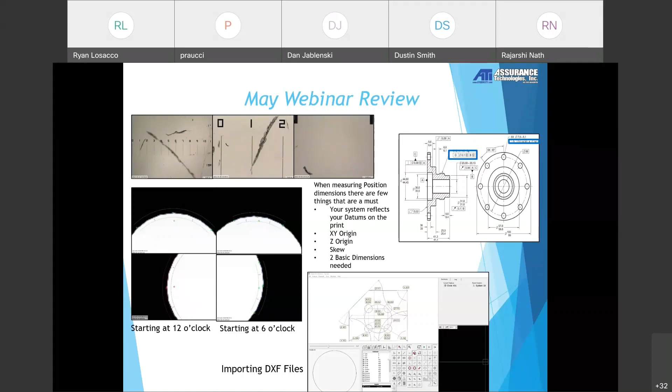And the last thing we talked about in the May webinar was importing DXF files and how we're able to actually have an offline version of Inspec that you're able to purchase, so you can program off of DXFs anywhere that you have a computer and you can plug that dongle into. A lot of people ask me if there's a demo version of Inspec. Anybody can download the software off of Micro-Vu's website, but you need that dongle to enable it to use measurements and program offline.

Here's just a couple other lists of things that we covered. Auto generate drive points, some features and tools you might not be using. So if you did miss the May webinar, these are the topics.

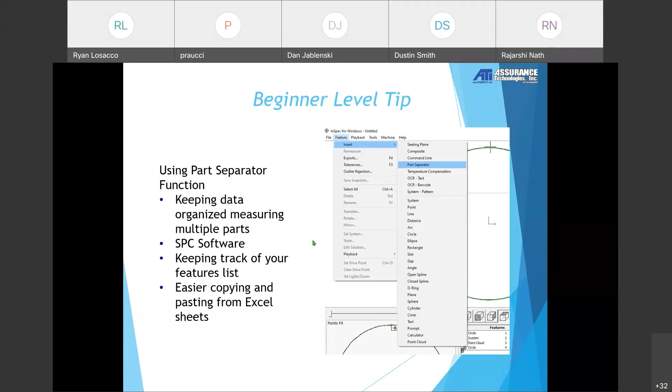it's available. And also it's easier copying and pasting from Excel sheets, and we'll be able to export a little bit of data today, kind of show you that function. So let's go over to Inspec here. So I got this part here with a bunch of different diameters. I'm going to treat each one of these honeycomb looking features as a different part, just for this example.

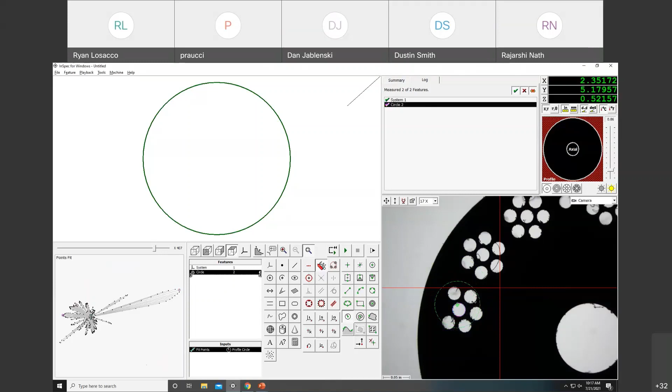I'm going to do a recall refsys to make my program fully automated, and I'm going to go over here and measure just a bunch of diameters. I'm going to use the profile circle tool just for ease. The reason I wanted to use this to show you, sometimes it's not repeatable. If it sees other diameters in that profile circle, it might grab whichever one it wants. Or if it sees too much flash or burrs, it might not be able to measure it.

So because that's not being nice at all, we're just going to go to the old Fscan circle. All right, so we got one. So now say this is my whole part, my whole program. I think a lot of us wish all of our inspection was this easy, of just doing these 6 to 7 diameters that we're going to get here. When I get done with one program, I'm going to go ahead and rename these. Dimension 1,

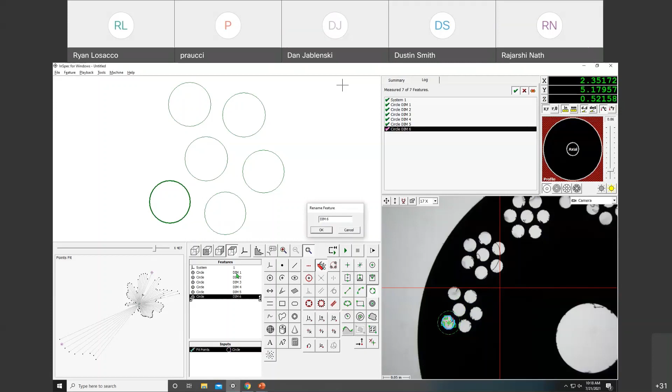dimension 2, dimension 3. I'm going to show you another reason why I like part separator, because even though Dan and I have programmed countless parts, when I translate, I sometimes forget. When you translate, you have an option of appending copy number to feature names. You can do that or not. And if you translate your program and you mess up on a couple things and go back, you end up getting a lot of underscores. So it'd be dimension 1, underscore 1, underscore 2.

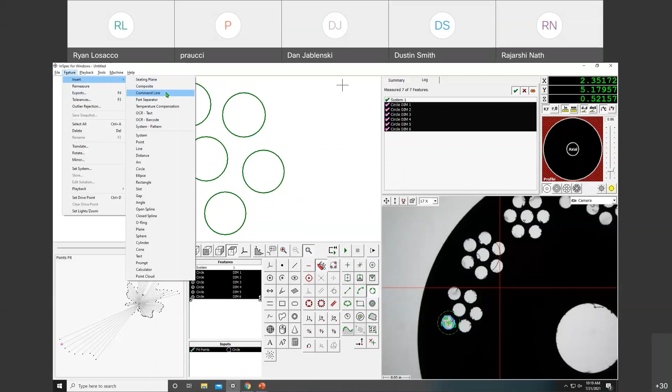And if you mess up and delete, sometimes you end up having a lot of underscore additions to your names. So I like the part separator because if I end up doing that, it helps me keep track of where I was and how I can correct things. But I'm going to go ahead and do this part separator. I'm going to highlight all my circles. I'm going to do my exports. Let's just go ahead and do diameter.

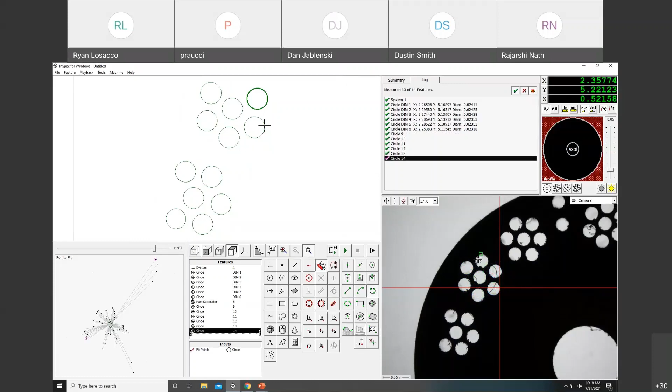Let's give it some more information. And then now I'm going to measure this part, I'm going to add in another part separator, and I'll do this last one over here. Some of you might be thinking I didn't export the second part, but since we're going to group export all these features, since they're all circles and I want all the same thing exported, diameter, close, so now I got all those exports there.

And you don't have to do one at the end, but I'm going to do one at the end here. And then now I'm going to come to File. I'm going to do a manual export, and go to my desktop.

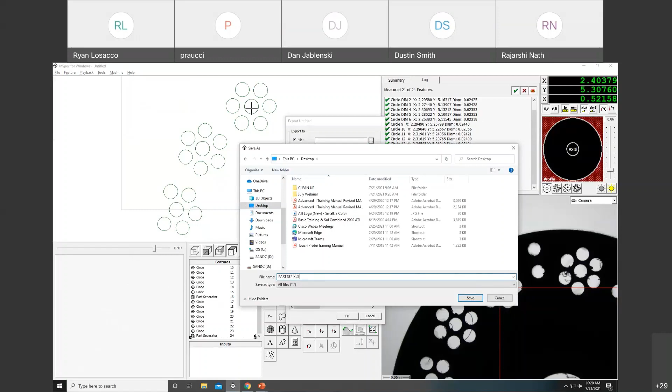.xls, so we don't end up with a text file. I'm going to do tab new line, new line. I like tab new line because all my data ends up being in one column, so I can copy and paste over to my Excel sheet that has our inspection sheet.

I'm going to do tab new line, then I'm also going to show you comma, that a lot of SPC software and CPK, and depending on how your inspection report looks, might be a better option for you. I'm going to click OK, and since this is a manual export, as soon as I click OK, it exports to my desktop.

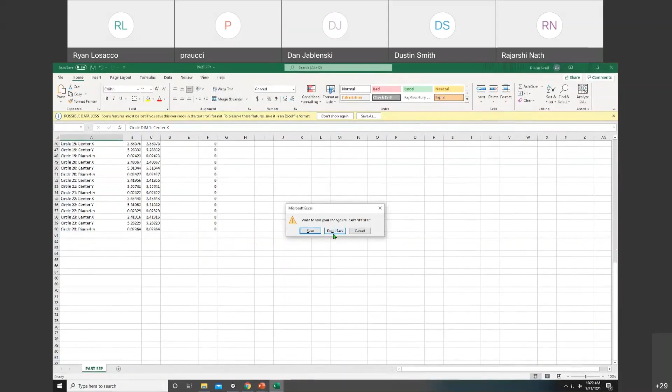And see how all the circles are together and we can't tell where one starts and one doesn't? That is because if we come over and exit out, don't save because we don't want a new one. Let's go ahead and rerun this guy. And this time,

oh, Dan just told me to move a little bit slower because the Webex is lagging a little bit here. So sorry about that, guys.

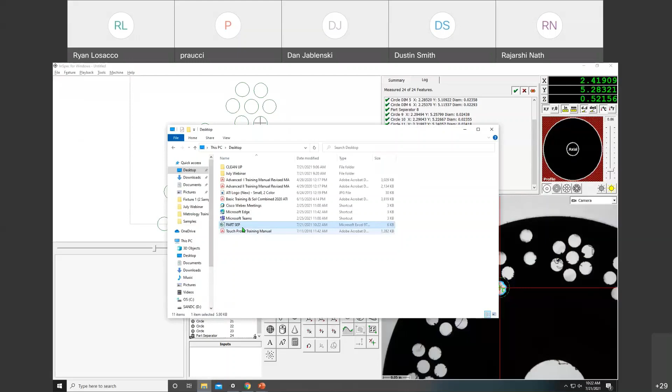Now I'm going to do comma, append to existing file. Go back to the desktop. Go down and find. So here we have all of our sample 1, sample 2, and sample 3. So this is where it's really helpful for the part separator to do comma, and then you get all your data here, and we need to expand some of these guys.

And this is what a lot of your SPC software will like to see, but also any SPC software that you do have, there's probably help. So we distribute ProLink. So if you use ProLink, we're able to help you and connect you with those guys, and they'll be able to tell you what form you need all this in. But this is where I'd look at this row and have all this information. It probably wouldn't like the double quotes going on, but this is where it's able to do all one.

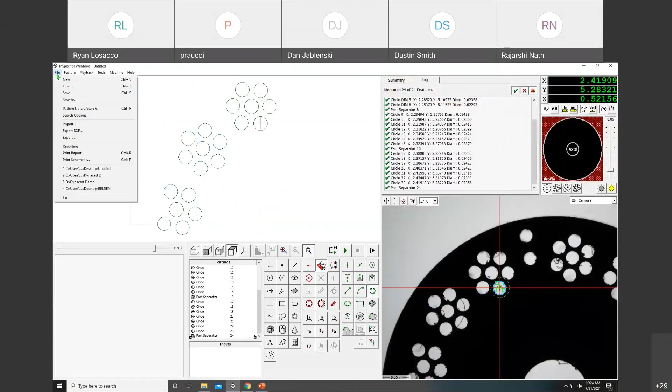Now, if we didn't use the part separator, we would end up having all those 3 different samples in one row. So you would have all the data in one row and it wouldn't separate it into 3 different rows here. So it could get really confusing and you could have a really long Excel file going on over there. Again, just a little tool in your toolbox that might be helpful. You know, if you could use it, great. If it's something that you're not going to use, totally fine.

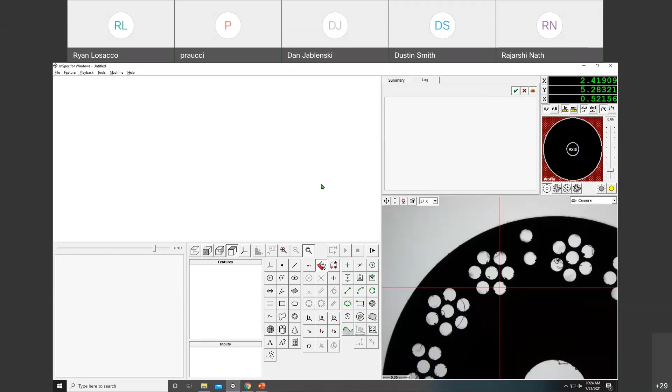And these little things, usually these topics come up with a customer coming and asking, hey, I'm trying to do this. What's the solution here? Which is actually a lot of the topics that we have going on here, like exporting point cloud data for R&D. That actually came out last week at the training seminar and this week of trying to figure these things out. So feel free to shoot us messages to talk about these things and find you a solution, where we might be able to pull some cool tips and tricks out of the calculator function and other functions that you might not use every day.

So let's talk about flatness. So if we go back, I want to show you the example of what would be on a blueprint. So if we have this print right here, we have flatness of the whole surface as a 0.3 tolerance. But then connected to that, underneath that is a box that says 0.1 with 10 sections.

So you can see my example here, and we'll do it live in a second, it's looking for the overall flatness of the whole part, but then also it's looking for individual sections to make sure that that's controlled across the board. So I'm going to use the translate function on this part to be able to program faster and also set my tolerance once instead of trying to tolerance and export 10 planes.

And another thing too is a lot of the times when I'm doing inspection, I'll think, all right, I got to get flatness of the whole surface, and then I'll go back and get the 10 samples. I'm actually going to get the 10 samples first, because if we do plane more inputs, we can select all these planes and make one plane out of all of it. So that's a little quicker programming. So I'm going to move over to this part that I got. Get that guy in focus.

This is actually the part I was looking for. Get that guy in focus. I'm going to do line, more inputs, Fscan line to get my program up and running. I'm actually going to do a recall refsys first, so it's fully automated. Line, more inputs. I'm going to use the Fscan line.

Down to the edge. I'm going to measure this line down here. I want you guys to pay attention that it's taken me, what, a little bit of time to come measure these lines. I'm trying to find my way around the part. When we talk about splines, I'll show you how it's a little easier to find your way around the part using splines.

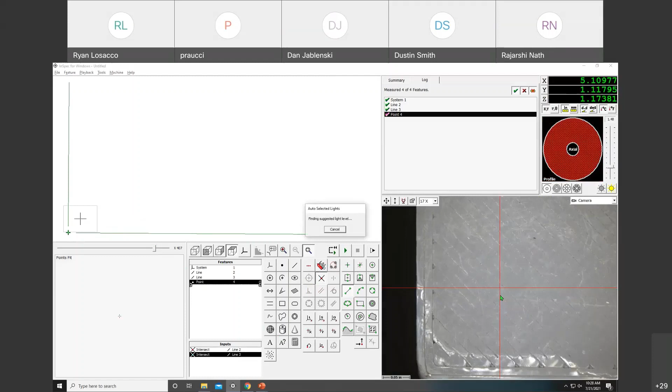I'll turn my surface lights on. Remember, anything that we do in Z, we want to go to a higher magnification. We gain a little accuracy in Z. Anytime that I have a light plastic part, or even really any surface finish, I always check out, see what axial light looks like compared to surface light.

Because remember, the camera is looking for contrast between light and dark. And so the better contrast and less gray value that we have, the better our camera can be able to focus in on surfaces. So right here, using just the surface light, there's a lot of gray value going on. So I like to look over and see if there's any better with axial light, which we're seeing a little better contrast between light and dark.

I'm going to do focus point. Focus on there. We might switch back over to profile light or surface light. See how that looks. How quick that focus point takes the surface. We might have luck with the axial light there.

So now I'm going to do my origin of X and Y. So remember, a solid system has three things: origin at X and Y, origin at Z to the focus point, and a skew to your longest line. So now I'm going to move up to this corner here. I'm going to do a plane. Try to do a low mag here. I know anything in Z, you want to be at a high mag.

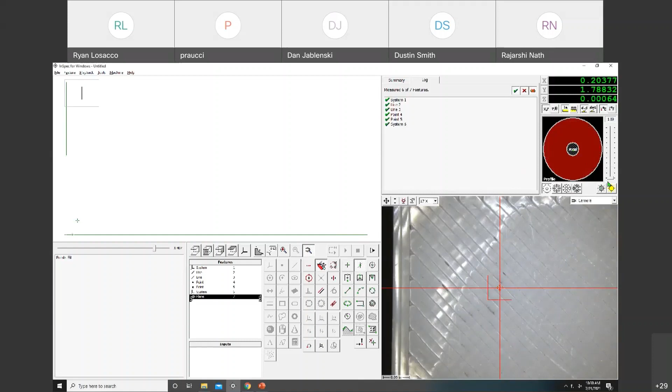See what other better lighting we have going on here, because the focus point isn't liking the light we have going on. And this is, I know, a challenge for a lot of you guys. It's finding the best lighting for every single feature. Grab that edge there. I think last time when I was on the webinar, it wasn't liking the focus points either.

So I'm going to show you, just for time's sake, I'm going to use manual points. Don't ever use manual points. It doesn't even give you flatness. It could, but it's wherever you are in Z. But just for demonstration purposes here, I'm going to do a bunch of manual points. So we get one plane over here. I'm going to make that plane a little larger. I'm going to do more inputs. We got this plane going on here.

So what I'm going to do is I'm going to tolerance this plane. We're going to do flatness, 5 thou. I'm going to export this flatness. So we're all set up. Now I'm going to translate this. We're in inches. I'm going to switch over to millimeters.

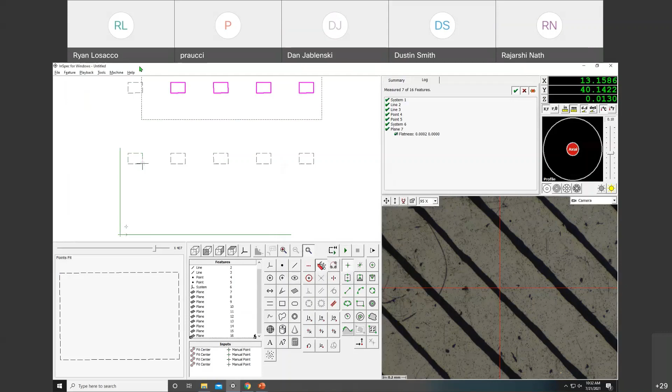I'm going to translate this guy, let's say every 25 millimeters in X. I switch over to grid here because I want to do a grid system for the translate. I'm just going to say 4 copies, and then we're going to come down. Let's go 40. Let's see what we get. I commonly do this when I'm programming. I forget to go negative because it's always in relation to where I am, where my system is. So I'm going to show you guys how to correct that.

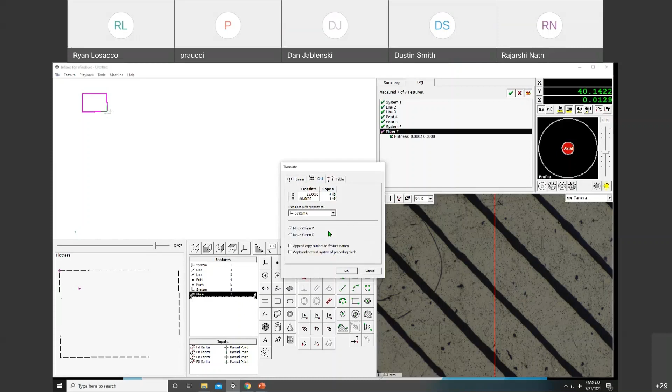So I'm going to translate positive in X because I'm going to the right on my part and on my stage. So that's fine. 25 on the grid system, 25 millimeters. We'll go 4 copies, and I need to go negative 40 millimeters down because we're coming towards the front of the machine. So that's negative, and it's all in relation to, in respect to the system. So we want to move this negative in Y down on the part.

There we go. So now we have our 10 different sections going on here that when we rerun this part, it'll go and take all those different planes, and they all have that tolerance that we put on it. And now we can go plane more inputs, and we can click and drag, see what we can highlight, and it creates one plane across the whole 10 planes that we did.

And then we can tolerance this separately to being a little more wide open tolerance in the case of our blueprint. So now we're able to do our individual sections and report those, and then as a whole, we're able to get that. So if you ever see this on your blueprint, where it's 2 flatness callouts of the same area, but it has the 10 different areas, that's what it's asking for.

Sometimes you might want to talk with engineering or your customer or supplier and see how large of an area those 10 sections need to be, if they need to be really close together, depending on whatever you have going on. So it could look like this, or maybe they have just 4 sections in the 4 corners. Just make sure that you have that little bit of communication to make sure that everybody's reporting the same data, and you know top left plane to bottom right plane, which one is which on there.

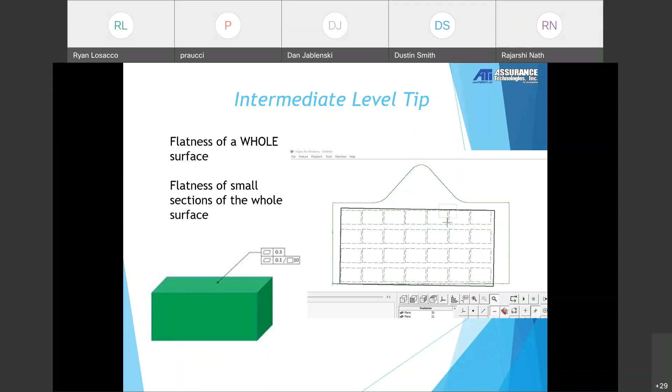Because you might have great flatness, but your profile might be out or something might be going on with the plane and your profile's out. So this type of software is really nice to use. I know there are some CAD softwares out there that you're able to import X, Y, and Z raw data and lay it over the CAD file. So that's really nice. If you don't have CMM Manager and you have other CMM softwares at your facility, it might be worth seeing if you can do this, because you can measure it maybe quicker on the Micro-Vu using Vision or Touch Probe if you have it, and then exporting it to that software.

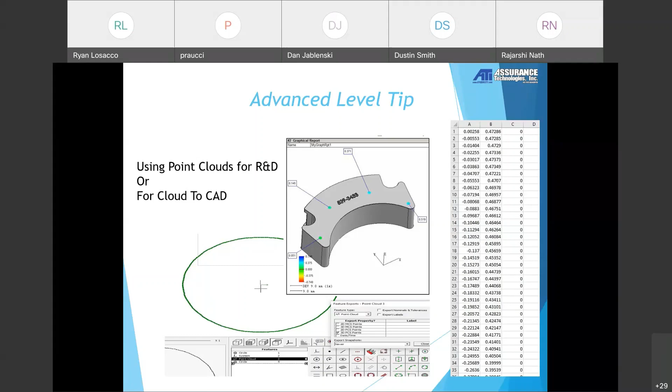I'm going to come over to this machine part here. Actually, the first thing we're going to do is a circle, finding out the wear and tear of a diameter. So we have our trusty old sample slide that everybody has seen and used a million different times. It's going to be a good example for us here. I'm going to come down. I'm going to do line intersection point. I'm going to do my origin X, Y, and Z just for time's sake to the intersection point and skew to the bottom line here.

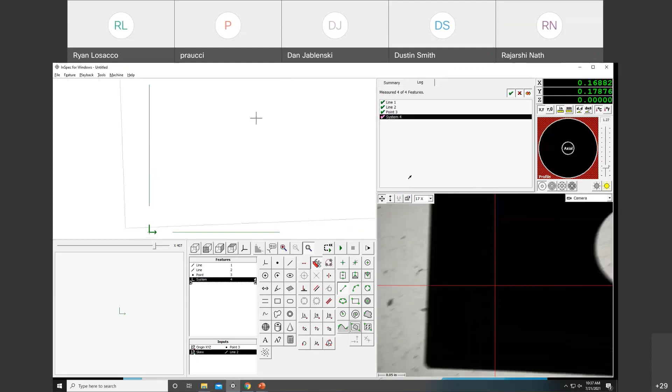If you're having problems with figuring out the best system for your part, we did create a little cheat sheet of common systems that came out of one of the past webinars. Let me know and I could send you that PDF. It's kind of helpful to see, all right, my part has 2 diameters but no straight edges. I'm going to use circle, circle, and skew between those 2 circles for an origin and system. It's kind of nice to have on hand.

So let's say that this diameter here, we made it brand new, and now we're doing wear testing on it and seeing what happens when we insert the mating part into it 100 times, and we want to see what's going on with it. So if we want to see how it's wearing, even though circularity might still be in, or if circularity is out, you want to figure out what's going on with the part. So I'm going to do circle. I'm going to do an Fscan circle just to set my origin to that diameter, and we got our origin in the center of the circle.

Now I'm going to come in, and you can use Fscan Arc, you can use more inputs and best edge, whatever gets you as many points as possible around this part to see the wear and tear on it. So the first thing I'm going to do is circle, more inputs, best edge, and I'm going to take 1 point there. Then I'm going to come down to my inputs, and I'm going to right click on that best edge. I'm going to rotate, and I want every 1 degree, 359 copies, and I'm rotating about system 6, which is my circle. And now I'm going to right click on circle 7 and remeasure.

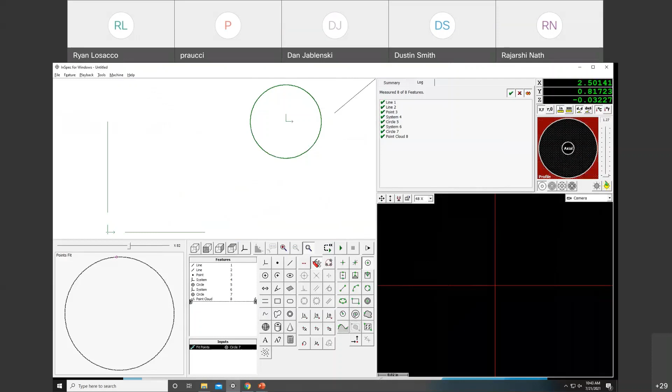Now also, if you needed to do any other surface, so if we needed to do maybe a plane, we could do the same thing if we came over to a surface here. Anything that you're just trying to extract raw X, Y, Z location out of, you can click that point cloud and you're able to do it as well. Let's hope that the focus point works a little nicer for me on this one.

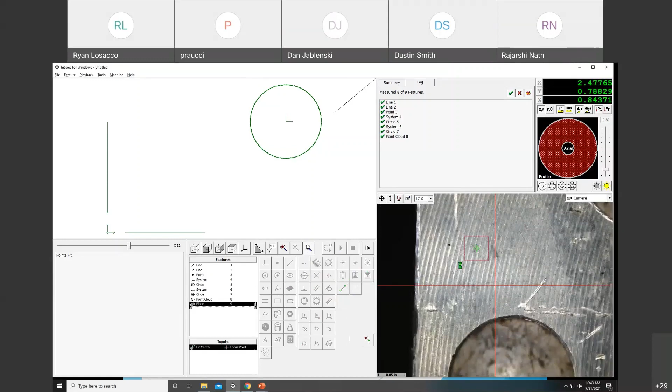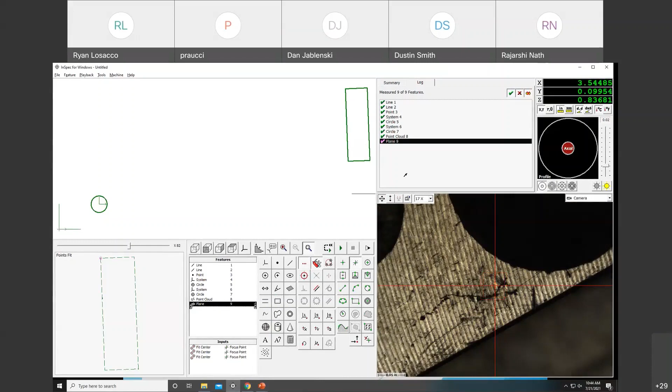I'm going to do a plane. I'm just going to do a bunch of random points around here. Something like that surface. I'm going to try axial light on there. Plane going on. I'm going to take a couple more over here. We got more inputs. A few more. So we have more points going on.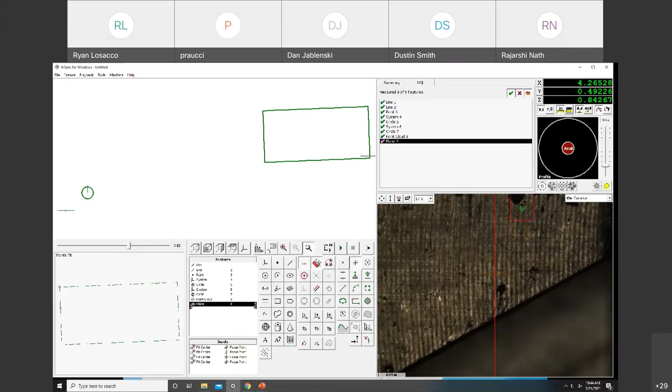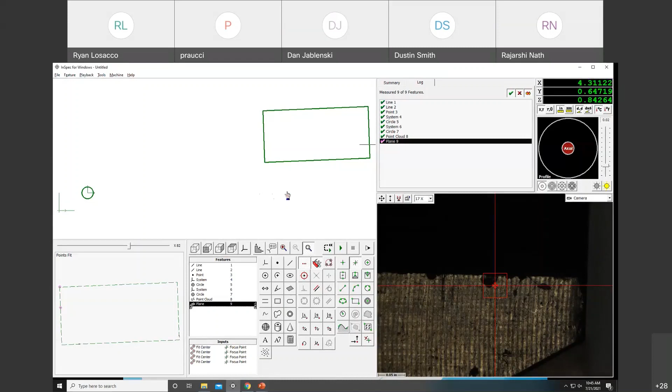Must be the WebEx platform that messes with the camera. I've seen it a couple times if you get on TeamViewer. So sometimes we ask you guys to get on TeamViewer to help out. If you guys need any troubleshooting issues, we can get into your Vertex, Excel, Sol, whatever it might be, and can control your machine. I've seen TeamViewer make the camera go blank. It must be something with the video card going on.

But let's move on. Let's do point cloud, and I'm going to click that plane.

And so now if we open up this view here, it just takes those raw points that are going on, and we can do the same thing: export the XYZ data, lay it over a CAD model, get your profile, get your surface profile.

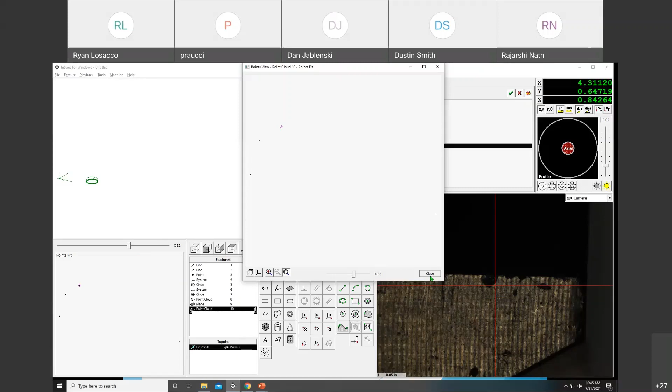So we found it really a lot easier to take the raw points on a Micro-Vu and transfer it over to CMM Manager to get our surface profile measurements instead of punching in a bunch of basic dimensions and the profile to tolerance that in our program. It's really nice. You can automate it on there.

Let's talk about max material condition and least material condition, getting some of the bonus tolerances out. So when you do true position and they give you the M or the L, you get your bonus tolerance. When you export it to Excel, it gives you what the bonus tolerance is that comes out of it.

So when we put in our X basic and our Y basic, our diameter, the tolerance of the diameter, it calculates the bonus tolerance for you. And it also adds the tolerance that the blueprint has and the bonus tolerance that the measurement has together. So for this case, we'd still be in tolerance on the lower tolerance, but the bonus tolerance gives us more.

Some of your SPC software, or if you're exporting to Excel, like up here, and you want to copy and paste it into your inspection sheet, it's really annoying to come over to this last column in our Excel sheet and find that bonus tolerance and put it into our sheet. So I like using the calculator function to pull that data out so it's in my one column here.

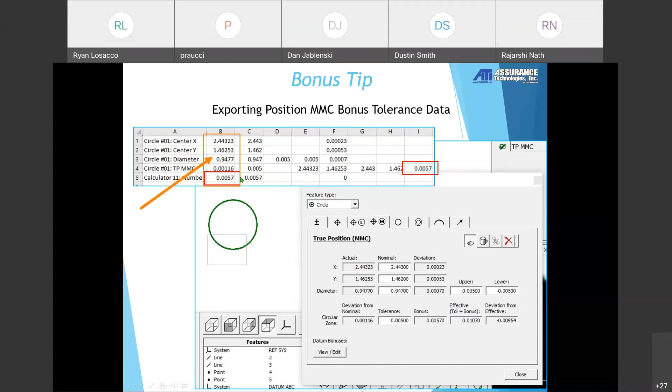So I'm able to add this to my inspection sheet to show that even if you're out of tolerance not using the bonus tolerance, but you're in tolerance using the bonus tolerance, you have it right here nice in your Excel sheet. So it's all in that one column there. So we're going to go ahead and use the calculator function for this guy.

That plane, come back to my sample slide that we have going on here. I'm going to add a recall refsys into there, set that system so we can have this fully automated. Remember, if you ever do insert here, make sure to do insert at end. So now I got this circle that is at system 4, so it's looking at my corner. I'm going to go ahead and delete this system that we have going on with the point cloud.

So I want the true position of this diameter. I'm going to come to max material condition. I'm going to punch in my basic dimensions. I'm going to put in my tolerances. Remember, in the lower tolerance, you always have to put the negative sign. I got a tolerance of, let's make it tight and say 2 thou.

So my true position is out of tolerance regardless of feature size, but with my bonus tolerance, I am actually in tolerance. So when I export this data, we can come to export nominals, tolerances, labels. We'll do our diameter, XY, location, true position, MMC. So now we have all of our information there, but I want that max material condition to be in the one column on my Excel sheet.

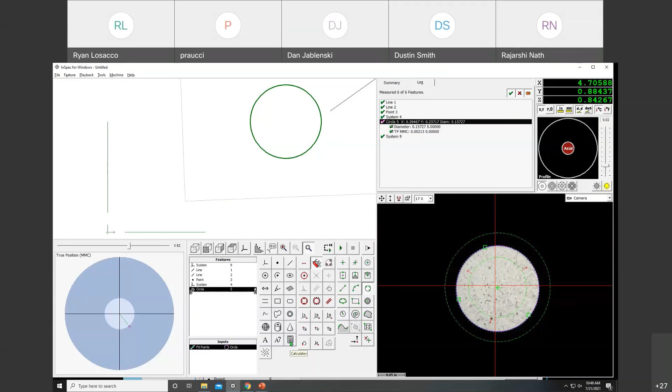So I'm going to click the calculator function. I'm going to click my circle, and it gives us this whole list of data that we can pull out of that circle. So I want to go to my position, MMC, and we have the option to extract the actual zone, out of tolerance, or the bonus. So I want the bonus. When we say calculate, it comes up with our bonus tolerance that we get. So now we can export that bonus tolerance

to our Excel sheet. But if you have an SPC software, or if you want your tolerance plus your bonus tolerance combined, what I like to do is go back to calculator function. I'll click my circle again. I'll click my position. I'll click my bonus, and I'll do plus. When you're using the calculator function, you need to put a 0 in front of your decimal place or it won't like it. And I'll put my true position tolerance here. And it gives us our tolerance plus bonus all in one.

I'll just show you guys real quick the error. Basically just says, hey, something's going on here, highlights it. So it's a nice thing about the calculator function that it kind of helps you out: hey, we're missing something here. Calculate that. Now we can export that data. Now if we go to File, Export, save, tab, new line, click OK. Go back to that file.

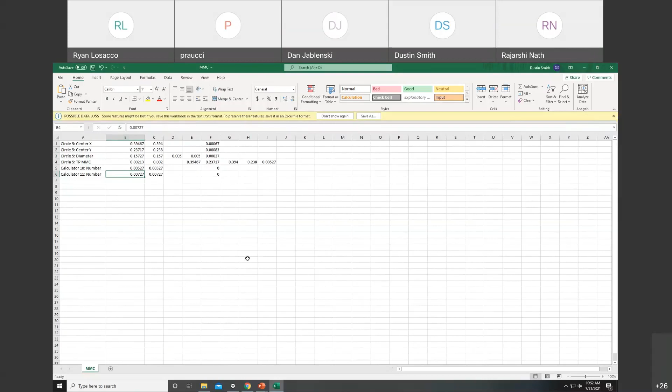All right, let's go to the spline trick that I want to show you guys. I've mentioned before, I don't necessarily like splines because there's no real data or lines or features that it gives you, and you have to pull data out of it. Also, if you have any scratches on your glass, it's gonna follow that. So let's go over to our software here. I'm gonna go back to this part.

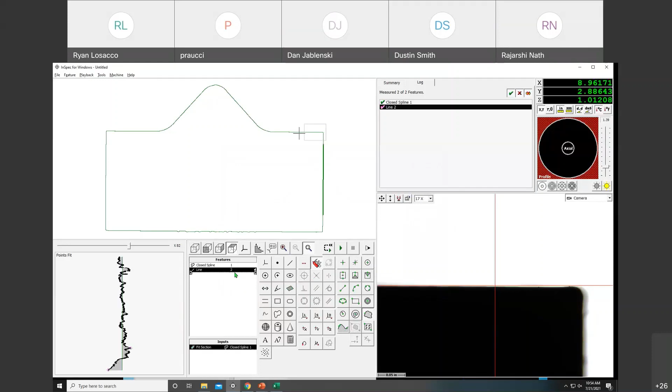And sometimes when it sees other lines and other edges, it'll say lost edge. But here we have a successful spline. It measured the whole outside of the part. There's no real data to it. If we click line, we can pull data out of the spline, which is cool because now we can grab features out of the spline. But if you're running 100 parts, there's a huge chance that it might lose the edge and fail to measure the spline, and you're kind of working against yourself.

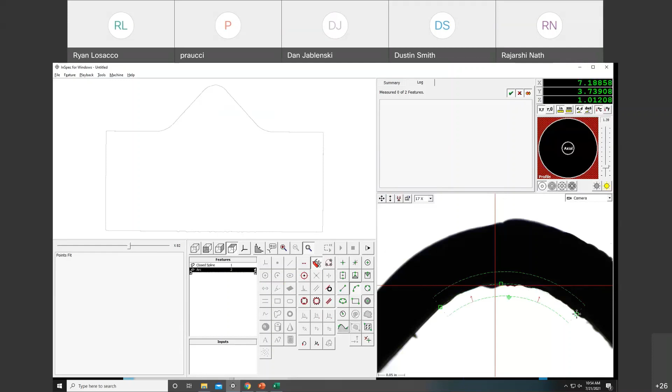But I use the spline so that if I right click and disable the spline, it won't measure the spline, but I know where my features are, and if I right click in the schematic window, I'm able to move right where those features are, or at least close by. So quicker programming, less time using your joystick or the stage control and maybe moving past your part, whatever it might be.

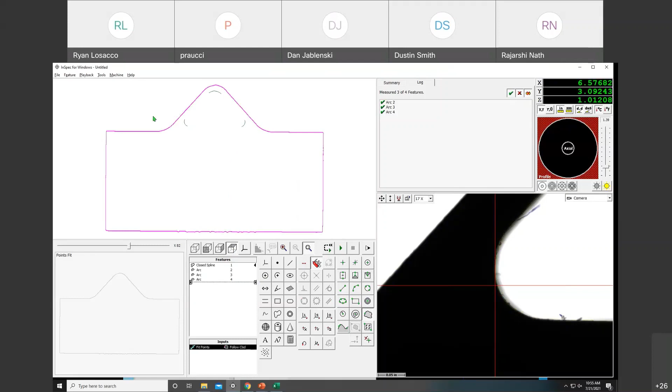So you can do your whole program. You can disable the spline so you have an outline of your part every time you open up the program, or once you're done with your whole program, you can right click and delete your spline so it's not even there anymore, and you just have the program you need. So it's a little trick to use the spline. Just remember, bump up your lights so you avoid any scratches on the glass.

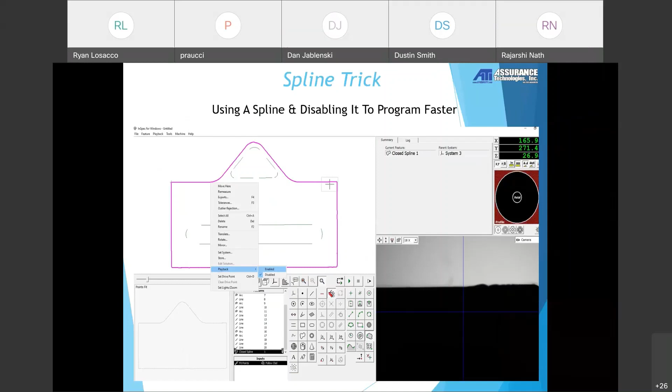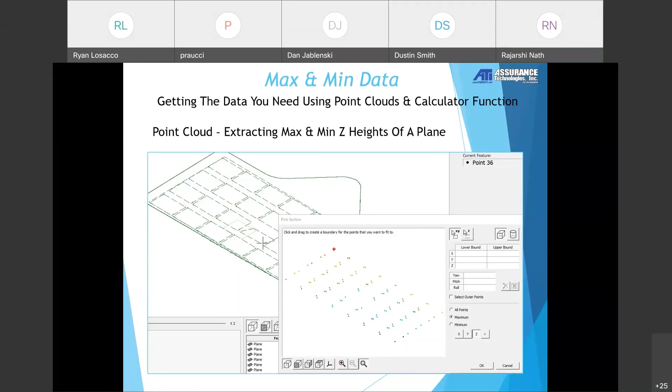So again, you measure your plane, you click point, so you're measuring a new point, and if you just click your point, this box comes up here, and you're able to do that. And you also can do it for lines, anything like that. I believe in a previous webinar, we talked about finding the largest flash. So remember that this is an option to pull max and minimum features out of planes.

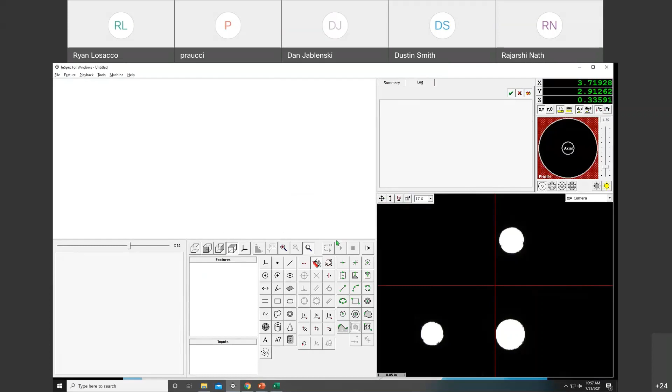What I do want to hit is I got this circuit board over here with all these diameters, and I want to show you another calculator function that I like using. I'm going to measure a bunch of circles. Try using the profile this time. Profile, so we're getting all these diameters.

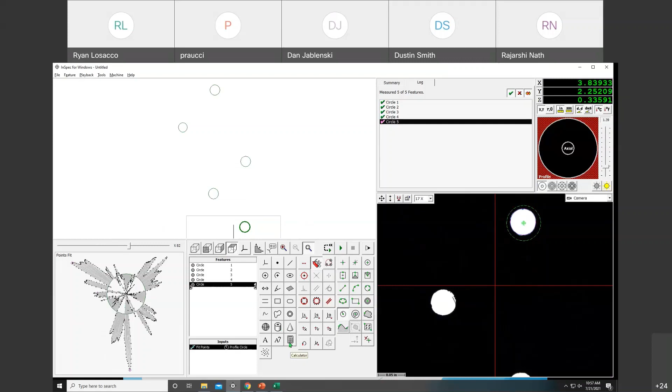Do 5 for now, and say we went and got all of our diameters. Now we want the maximum diameter size of all these diameters. We want the minimum, and we also want the average. So I'm going to click the calculator function, and you got all these options over here where I'm going to do average. I'm going to click my diameter.

Here's a little trick to do calculator function faster: I'll do diameter actual. I'll click my next one, diameter actual, and go through all of them. So I get all my features. And then I'll put a parenthesis on the end. When you hit calculate, it's going to yell at you because it needs commas between each of them. But it was easier to have my mouse just click all the diameters first, and now go back and put my space, comma. Now we got our average between these diameters.

But instead of having to go back and click each one of these, if you're getting average, max, and min, highlight everything up until the first parenthesis, copy it. So I just hit Control C to copy it, hit OK. Now I'm going to hit calculator function again. I'm going to say I want the max diameter, and I'll hit Control V just to paste what diameters I'm looking at. Hit calculate, hit OK, and I'll hit calculator function one more time, and I'll hit min, paste my diameters, calculate. Now I got my minimum.